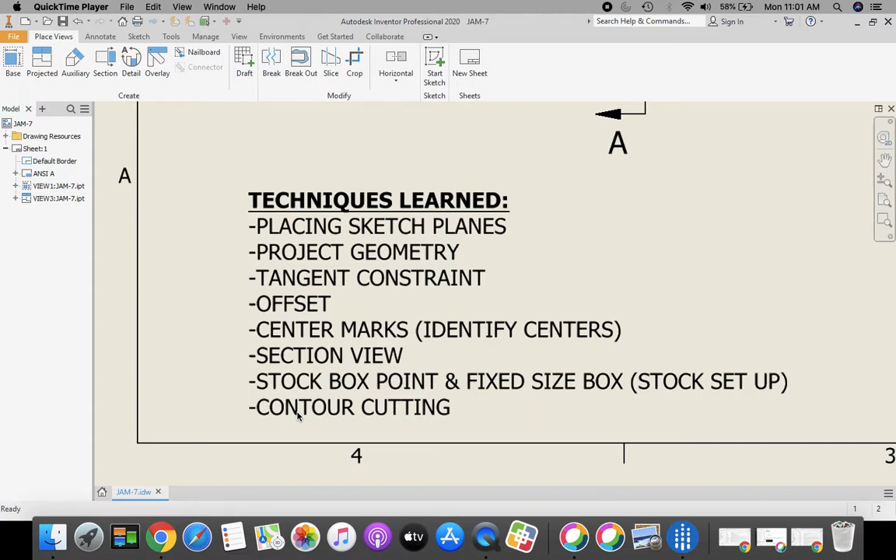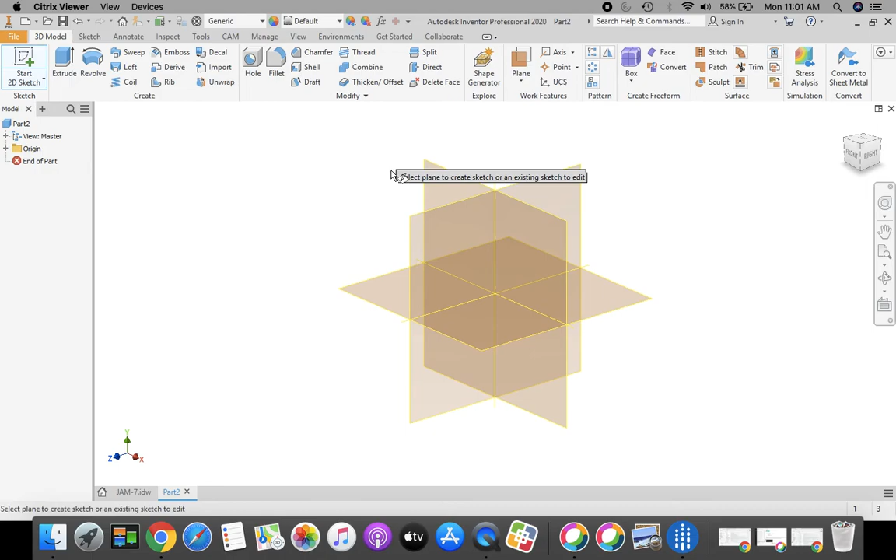As always, we're going to begin a new part with a 2D sketch on our XY plane, and click Front in our World View Cube. We're going to start with those two circles. We have a 3-inch circle that we're going to place around our origin, and a 2-inch circle out here. Each one of these is extruded back 0.75. Can you see these dimensions on the drawing?

Okay. Going back to my part, I'm going to grab my circle tool, start from my origin. This circle is 3 inches, press enter on the keyboard. And I'm going to take over here to the right hand side, click another circle, and this circle diameter is 2 inches. Press enter on the keyboard.

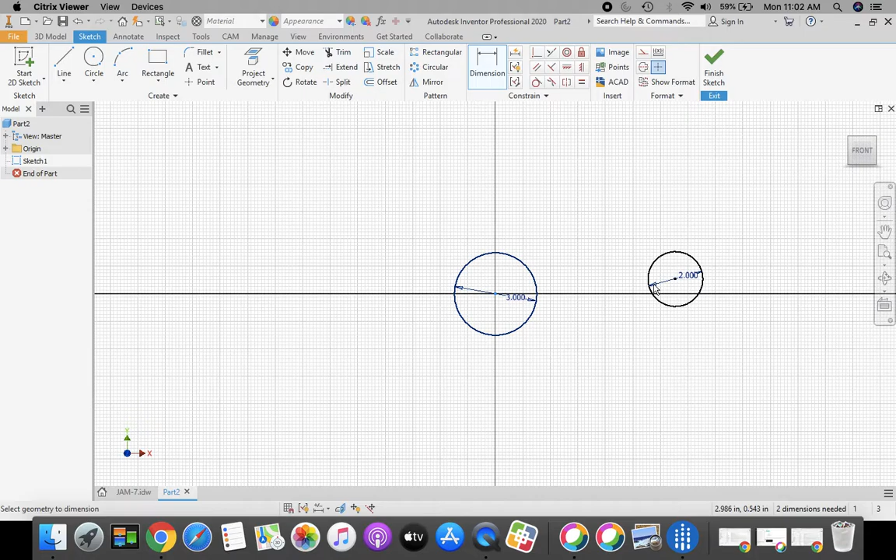Now we're going to constrain these two together. The first constraint we're going to put on it is a dimension. So I'm going to dimension from the center of my big circle to the center of the 2-inch circle. And this we want to have 4.5 inches, so type in 4.5 and green check mark. The other constraint we're going to put on this is to make sure that the center of this circle at our origin is even horizontally to this circle as well.

So we're going to come up to our constraints next to dimension, and we want to find that horizontal constraint that looks like a feather going horizontal with the 3 little lines coming out of the bottom. Okay? And we want to click the center of our 3-inch circle and the center of our 2-inch circle, and that's going to line them up horizontally.

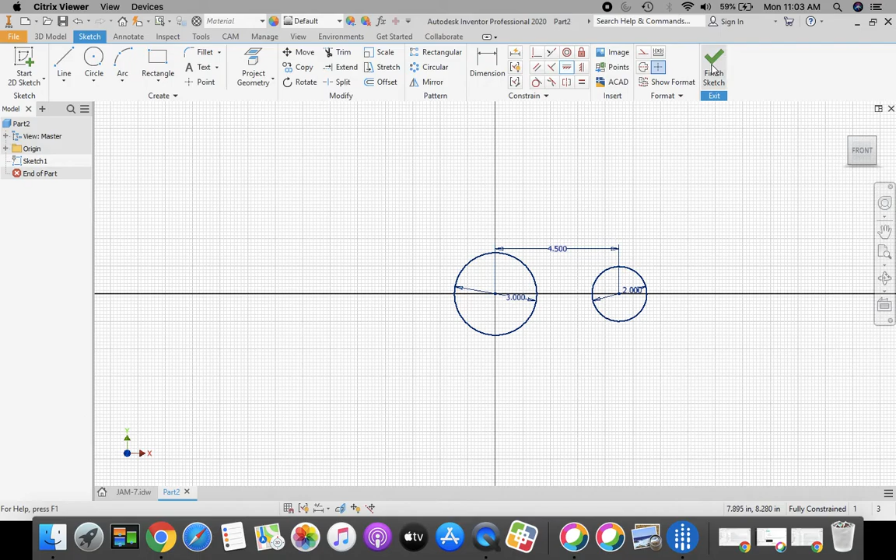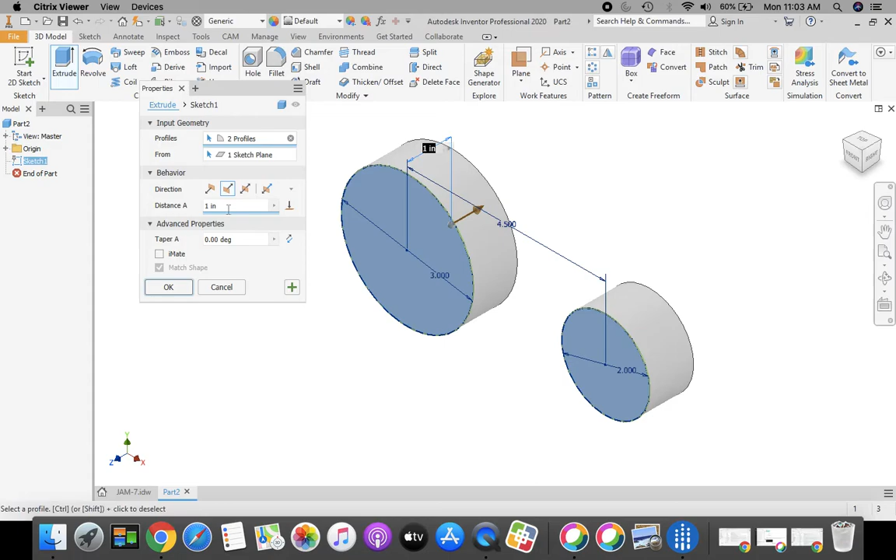Next, green check mark, finish sketch, go home, and now we're going to take and extrude. We're going to select both of these circles. We want to extrude in a flip direction, and we want to extrude a distance, taking a look at my drawing, 0.75. Okay, so going back to my part, we're going to enter in a distance of 0.75, and then click OK.

Okay, next what we're going to do is create this platform that's on the back that connects the two circles together. Then we're going to come back and do the rib and finish off with our circles. So if we take a look at that, these lines coming down are angular, connecting the two together, and we're going to connect them with those tangent constraints. Something new for us, so pay attention as we go through.

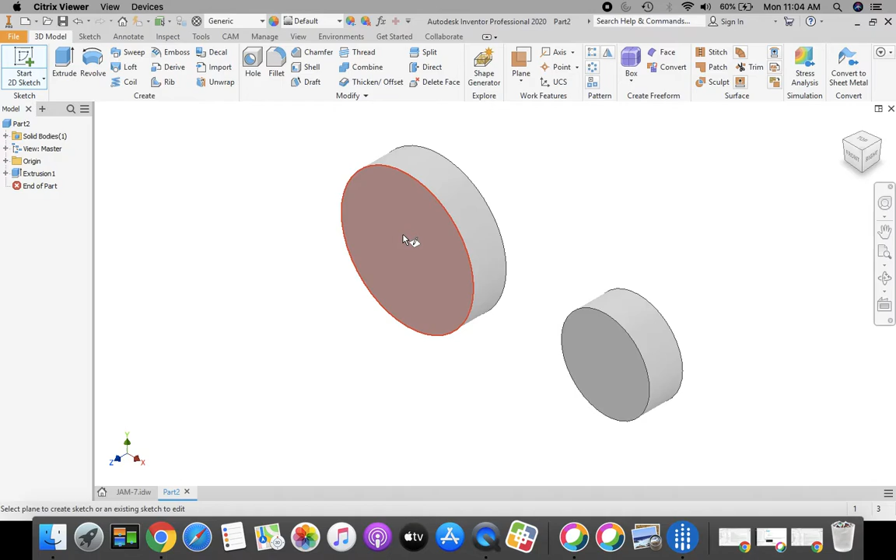We're going to take a 2D sketch, and I want to place this on the back of my part. Usually we've been placing our sketches on the front or the right hand side or the top. Here we're going to come and highlight the back of our part. Click to select it. Okay.

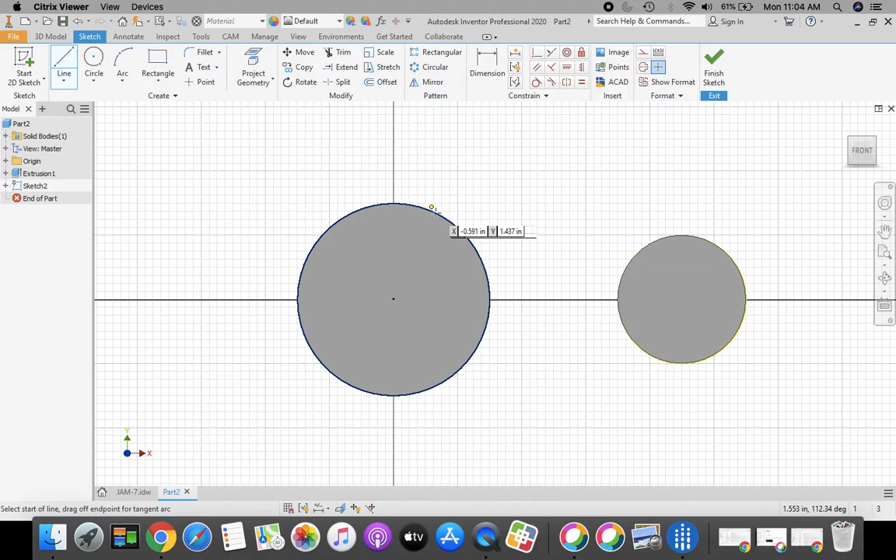Now what we need to do first is project the geometry from these two circles onto this sketch. So I'm going to project geometry right here, and click the big circle and the little circle to project that geometry on there. Next I'm going to get my line tool, and start on the curve of the circle to create my line. Please don't lock on to the 12 o'clock position of this. You want to be off that snap on the 12, and on the curve or the arc of the circle.

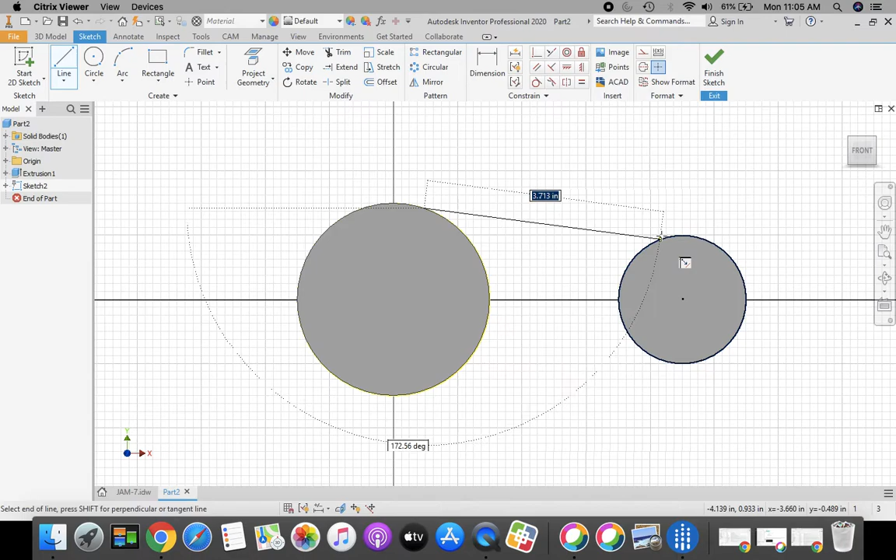And I want to come down and do the same thing to this smaller circle. Make sure you're not locked on to the 12 o'clock position of that circle. Okay? And do the same thing for the bottom. Don't lock on to the 6 o'clock position on these. Okay? Once we have that done, now we're going to make these lines tangent to the circles.

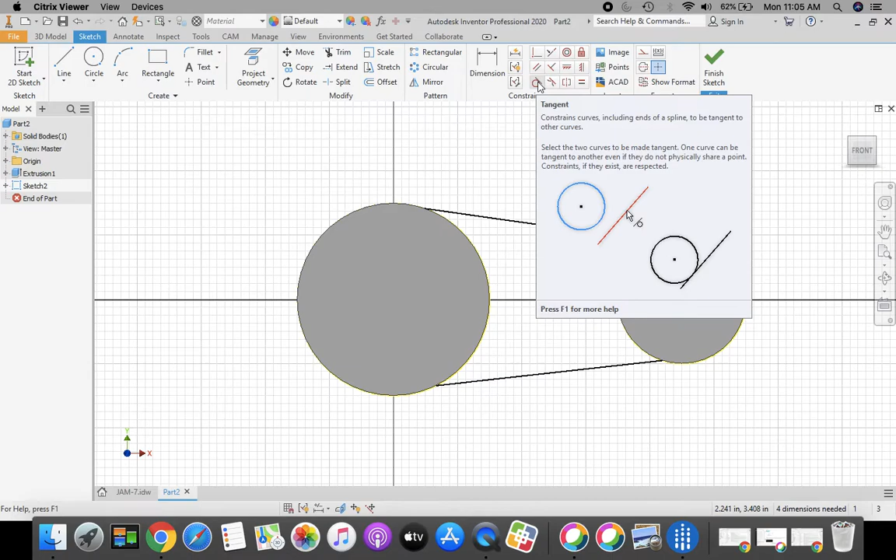And we do that by coming up to our constraints here, and selecting our tangent constraint, this one right here that looks like a circle and a line as a hat. Okay? And I want to click my line and the big circle. I'm going to click the line and my smaller circle, and I want to do the same exact thing to the bottom.

Okay, now I have these lines tangent to those circles. Now we're going to take the green check mark, finish sketch, and extrude.

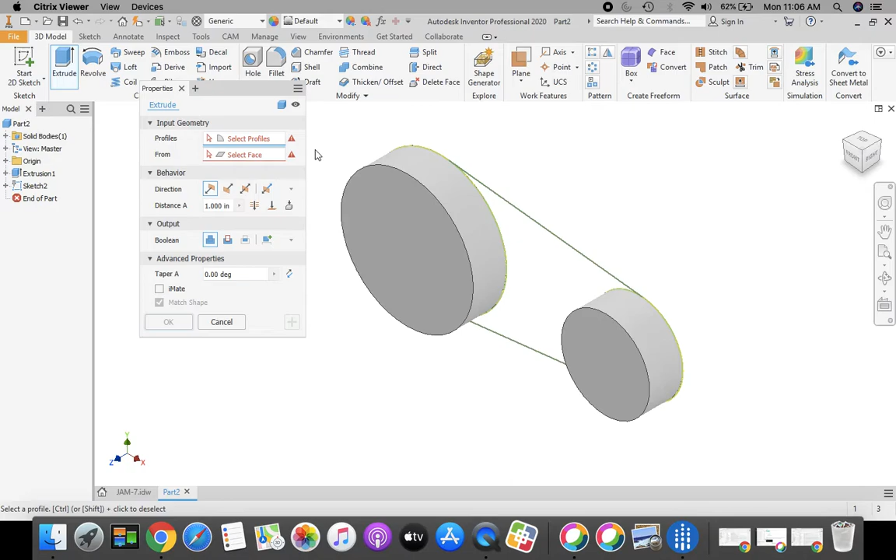Another important feature used in connecting those lines and projecting that sketch or geometry is this: if you didn't project our geometry, when we highlight this area to select it, it won't turn red because we don't have the curve from this circle coming down. If you didn't do that, you'll need to go back, project your geometry onto this sketch, and then finish your sketch so you can move forward like we are.

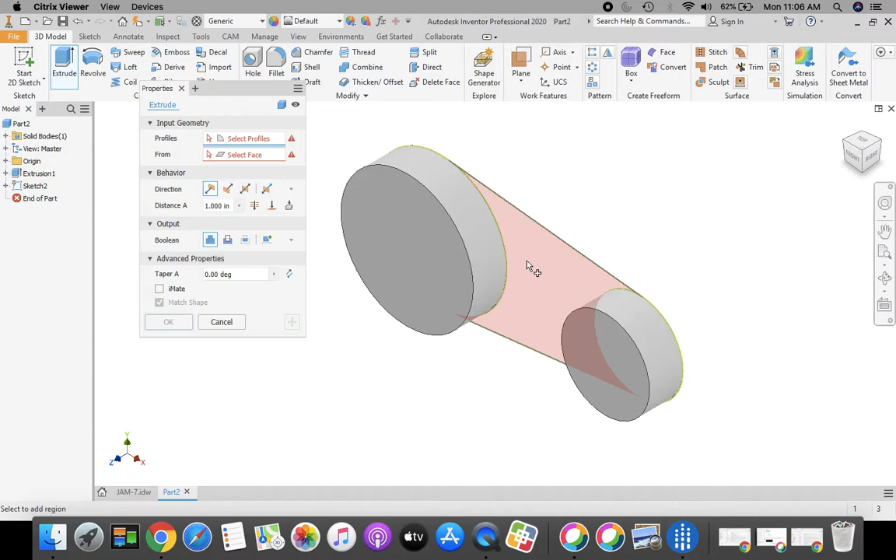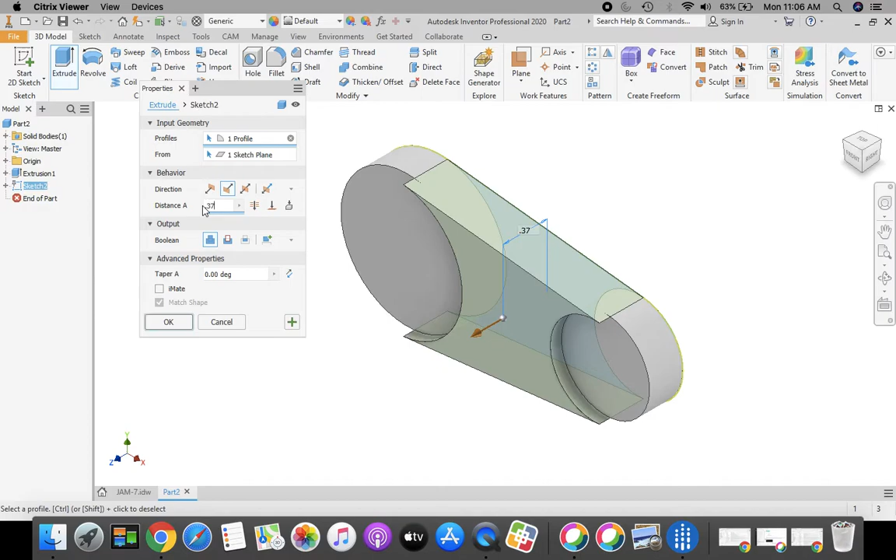Once that turns red, click to select it. Obviously that's going in the wrong direction, so let's flip that around. I want the thickness of this—let's take a look, it's 0.375. So going back to my part, I want to enter a distance right here of 0.375. And select OK.

Excellent. Next, let's take a look at placing this strengthening piece. It's kind of like a rib down the middle. Let's take a look at doing that.

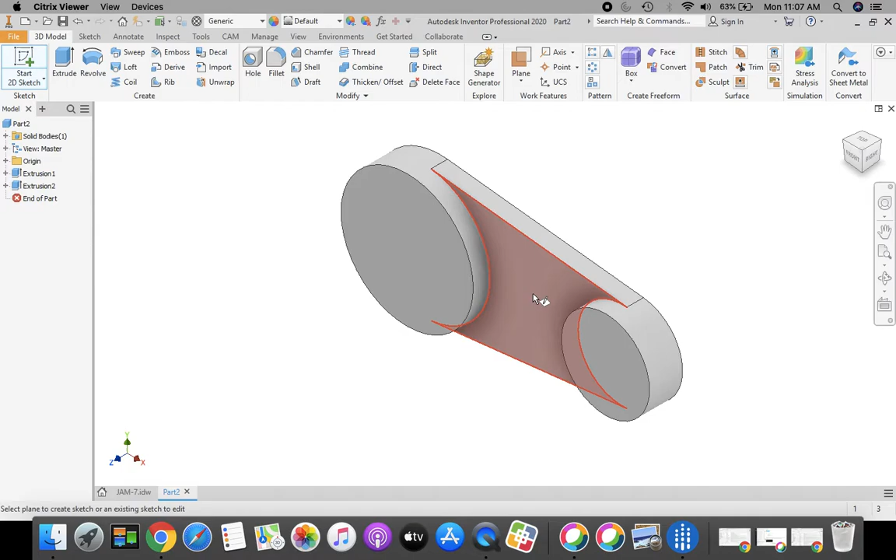We're going to once again do a 2D sketch, and place this on the front of that little platform. Click front in your world view cube, or the magnifying glass piece of paper to zoom all. And we're going to create that with our line tool.

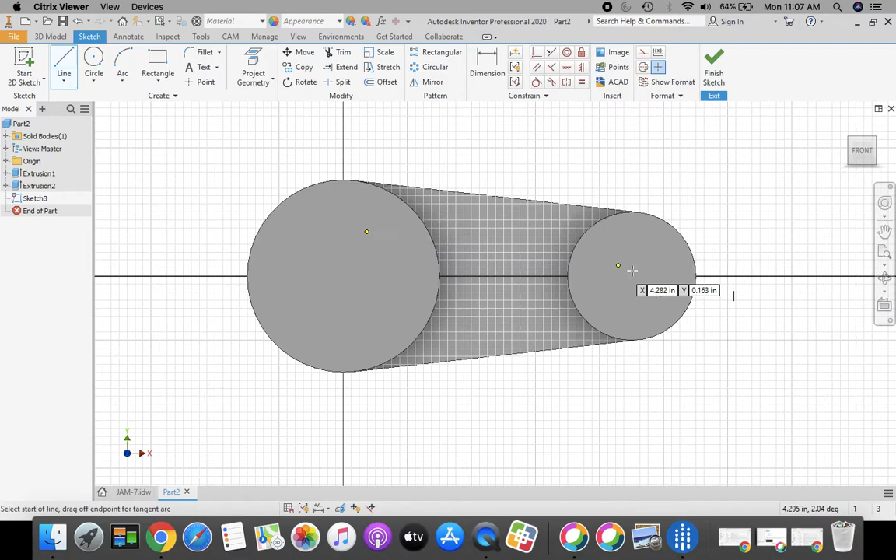The first thing we want to do is project our geometry onto here, because I can't select the center of my circle. So we're going to project our geometry, grab each one of these circles, then get my line tool and snap onto the origin. When I get my green dot, I'm going to sketch this out and snap onto the middle of the other circle. Then press escape.

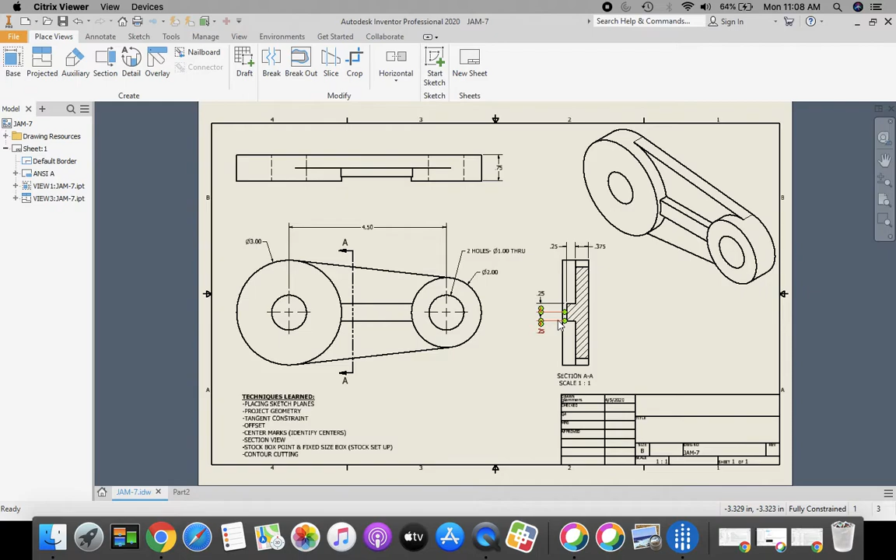This is where we're going to use our offset command. We're going to offset that line on either side. If you take a look right here in our drawing, we're going to offset down 0.25 and offset up 0.25, so this whole rib is a half inch thickness, or half inch wide.

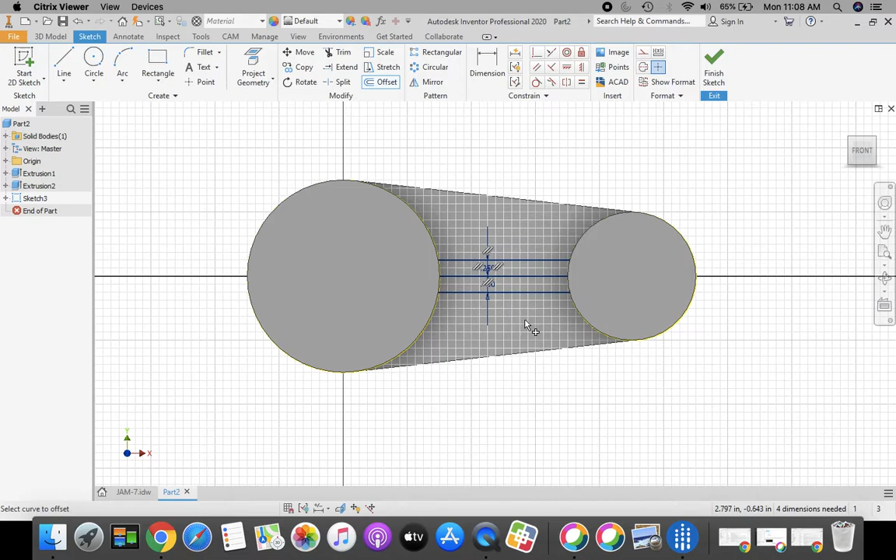Now we're going to use that offset command, and offset this line going up. Make sure your cursor is in the up position, 0.25, enter on the keyboard. We're going to take that center line again and offset it going down, 0.25, enter on the keyboard. Green check mark, finish sketch.

Before we extrude this, let's go back and take a look at our drawing. On our drawing, the height of this rib right here is 0.25, so that's our extrusion. So I'm going to extrude—I want to select that bottom feature first, then the top one. We'll extrude them both together.

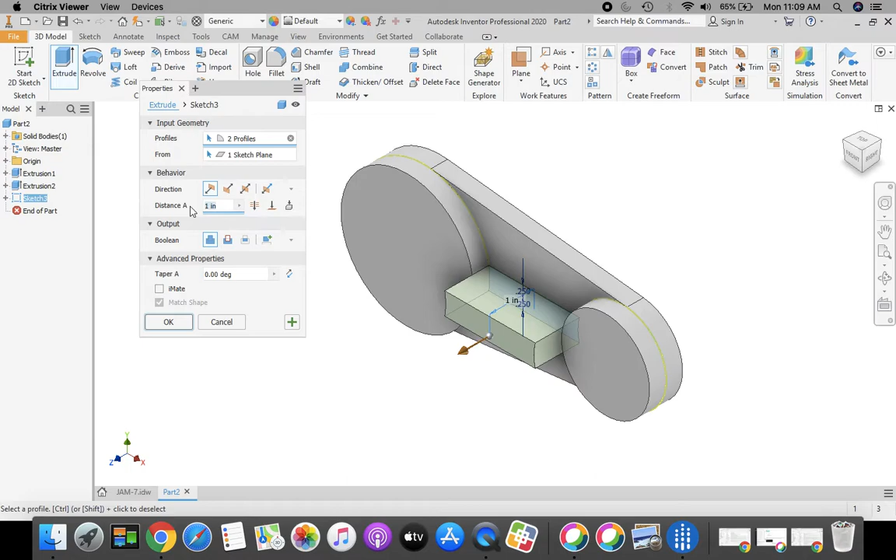It's going in the right direction, so we don't have to flip it. But we're going to enter 0.25 for my extrusion distance, and click OK.

Next, we have to take care of these holes. The holes are in the center of each one of these circles. They're 1 inch in diameter and they go all the way through. Let's take a look at creating those.

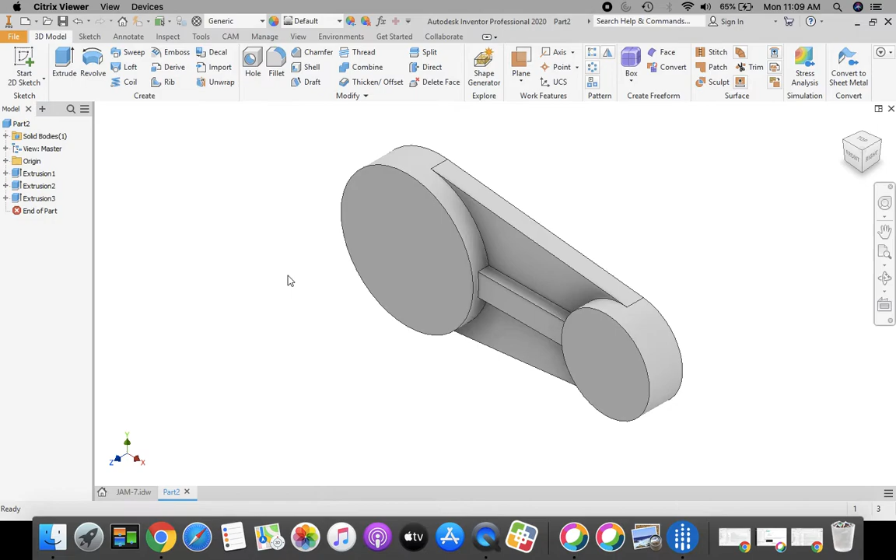We're going to take our 2D sketch and place it on the top of our circle. Click front in your world view cube, or the magnifying glass piece of paper to zoom all. What we're going to do is project my other circle onto here. Let's see if we can get it first—so I'm going to take my circle tool. You see how I can't get the center of that circle to highlight? So I'm going to press escape.

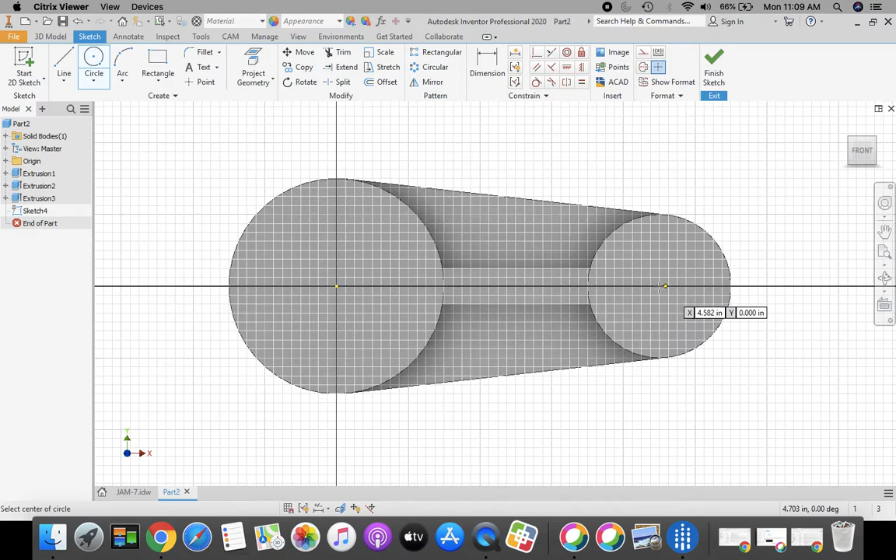I'm going to project my geometry—I want my circles to come up to this sketch plane. Now I'm going to get my circle tool, and click the center of that circle. This diameter is 1. Press enter on the keyboard.

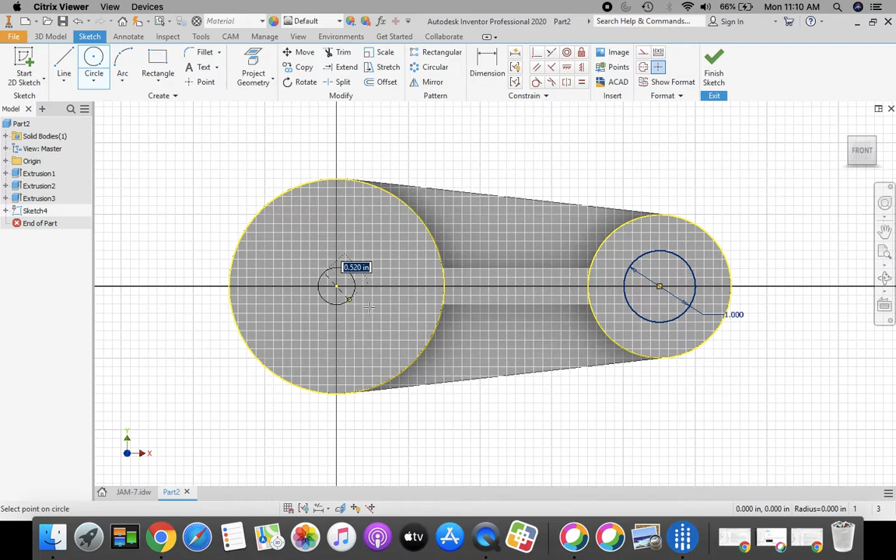I'm going to get the center of this other circle. When it turns green, click and stretch out a 1, enter on the keyboard. Green check mark, finish sketch.

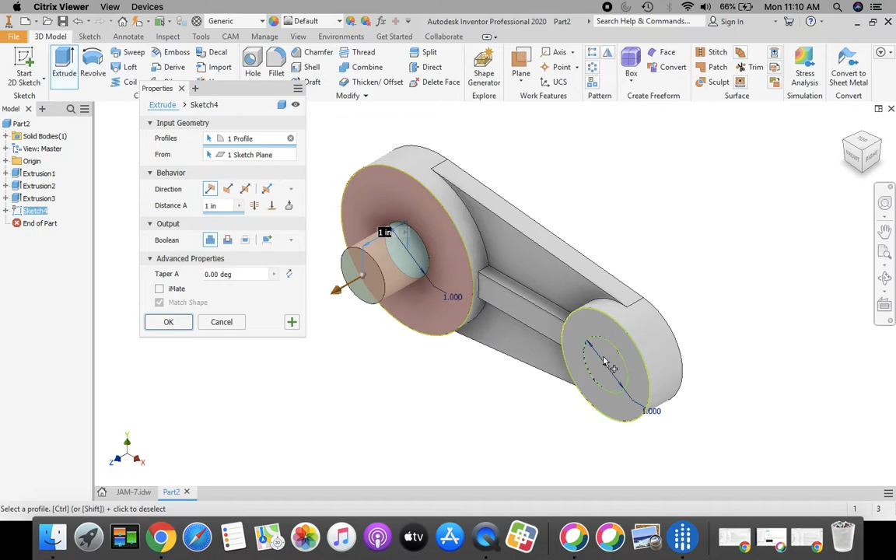Now we're going to take and extrude. Here we have to select both of these circles—you're going to have to move your cursor around until that circle highlights red. This is going to be an easy one for us; we don't have to enter a distance, we're going to make it go through all. Looks like the arrow going through the pancakes here. And then select OK.

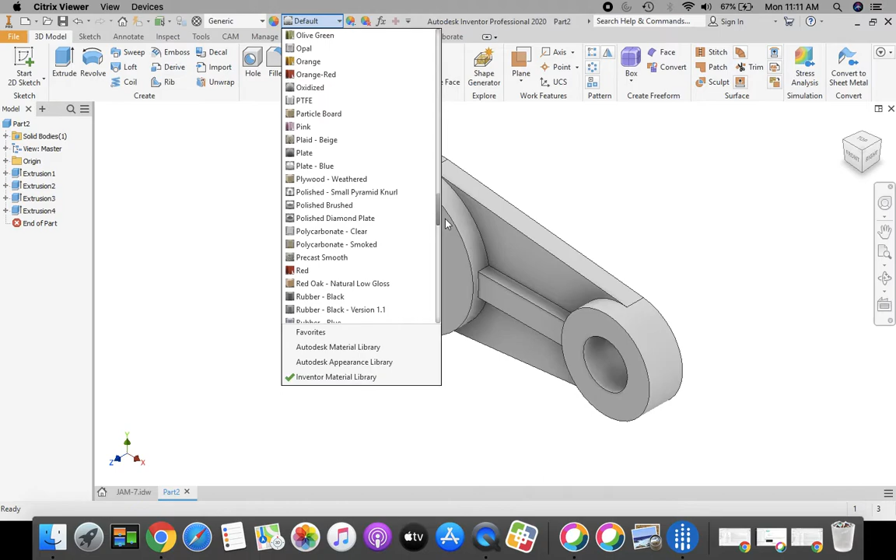Great job, this part looks almost finished. Let's go up to the top, above our ribbon bar, above our tab line, and change default. Click on the area here, and we want to go down and select violet, which is towards the bottom in the V's, violet for our material.